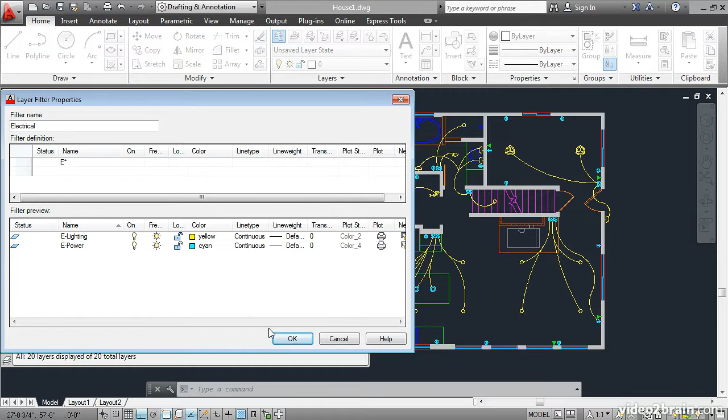Let's call this filter Electrical. Click in the name area here and type capital letter E. This filters the layer list to display only the layers belonging to the electrical discipline. Click OK, and the filter shows you the list.

Click on All to see all of the layers again. Let's create a different type of filter. Right here, you can create a new group filter.

Click the button and then press Enter. We will just accept the default name Group Filter 1, and right now there's nothing in it. Click on All, and then let's drag specific layers into the Group Filter 1.

Drag in A doors, A poche—poche refers to the shading inside the walls—and then scroll down and drag in the electrical layers and the D communication layer.

Then click on the group filter, so it receives only the layers that you drag into it. I'll select all of these layers by clicking on the first one, holding down the Shift key, and clicking on the last one. Then I'll turn them off by clicking any one of the layer's light bulb icons.

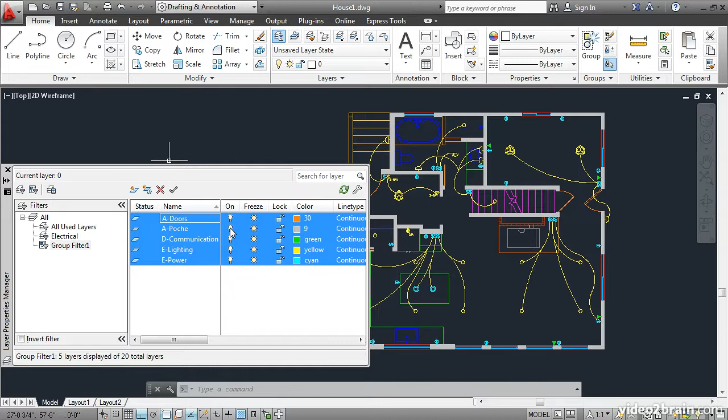Click on All to display all of the layers. You can also sort the layer list by clicking on these headers. I'll click once and then again to sort the list in opposite order, and you can see all the layers that are off are now at the top of the list.

Every drawing has a layer 0. This is created by default. Drawings can also have another system layer called Defpoints, and this is generated when you add a dimension object.

I'll scroll back up and notice that this one layer has a green checkbox next to it. That indicates the current layer, and you can only have one current layer at any given time. I'll double-click on A header right here to set it current. It also says that right up here, current layer A header.

I'll go ahead and draw a line over here in this door opening, and it will be on the A header layer. It's white right now because layer A header is white.

I'll click on the color swatch to open the color picker, and I'll select a color. I'll choose a green up here. Colors have swatches, and they also have numbers here. This is color 94. In AutoCAD, color is used merely to differentiate objects on screen.

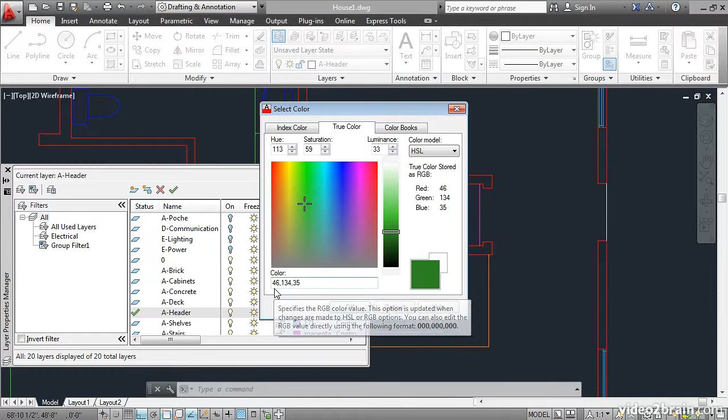It has a different role than in a program such as Photoshop, where you're representing continuous tone. However, you can select true color if you wish from this color ramp. You can drag the crosshair around to select a specific hue and saturation level, and you can also drag this slider to set the amount of luminance.

If you do this, your color will have 3 numbers representing the red, green, and blue components. I'll click OK. You see here, I can expand this by dragging it, and you can see the color number listed here. This is a true color, and these other numbers that are just single numbers, those are AutoCAD color index colors. I'll just go ahead and draw in the other header lines with the line tool.

I'll press Enter, Enter to end and restart the line command each time I need it. And then over here we have some other headers that we need. Again, headers are the part of the wall above a door or opening.

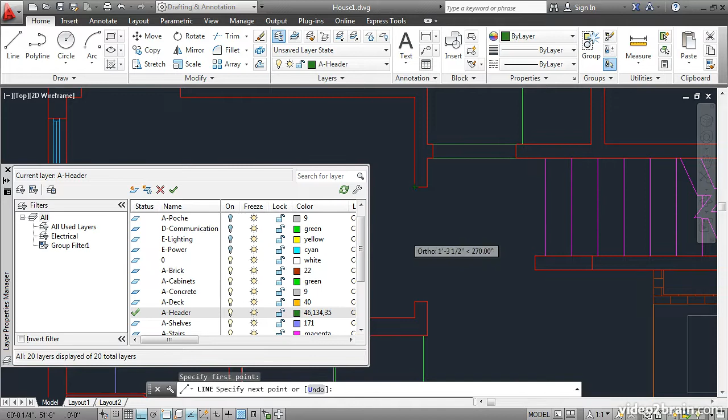Now watch what happens if I turn off this layer. I'll get a warning saying the current layer will be turned off, and asking what I want to do.

If we turn off the current layer, we have a potentially dangerous situation, because I could draw another line here, but it would be invisible since it's on a layer that's off. So you should avoid this practice.

Instead, I'll turn that layer back on and set a different layer current. I'll double-click on layer 0, for example, and then toggle off A-header. If I were to draw an object, such as a line, I would see it because it's on layer 0. I'll turn A-header back on and erase these stray lines.

Layers can also be frozen. If I freeze a layer, it likewise hides it on the screen. The main difference between turning a layer off and freezing it has to do with regeneration. I'll zoom out a bit and demonstrate that for you.

I'll make A-header current, draw a line that extends up above the plan some arbitrary distance, and then zoom extents. Then I'll turn this layer off by setting layer 0 current and turning off A-header, and zoom extents again by double-clicking the mouse wheel. It's the same view—AutoCAD is still considering that line when it does a zoom extents.

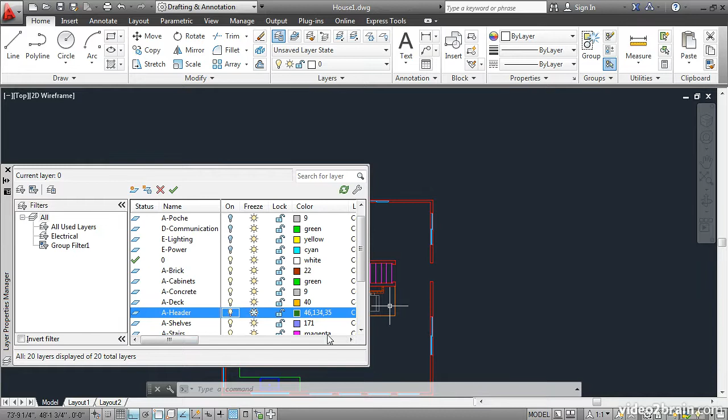However, if I freeze the layer and turn it on, it's still invisible. But if I then do a zoom extents, AutoCAD is no longer considering that object. That's the main difference between turning something off and freezing it. I'll thaw the layer and erase this line.

You can also lock and unlock layers using these padlock icons. If I lock A-header, notice the color dims slightly. If I put the cursor over A-header, you'll see a padlock icon appear, meaning it's locked and I can't do anything to it.

If I try to erase it and click on it, it will say one was on a locked layer and won't let me select it. This isn't really a security feature, because I can come back and unlock the layer, then erase it if I wanted to. Locking is more of a convenience to keep you from inadvertently deleting things you want to protect. Layers have other properties you can access by scrolling over.

Here we have line type. I'll click on the word Continuous on the A-header layer and change the line type to Phantom2. The style of the lines changes—this line doesn't actually have any breaks in it, it's still a single line object, but its representation uses the Phantom line type. I'll change that back to Continuous.

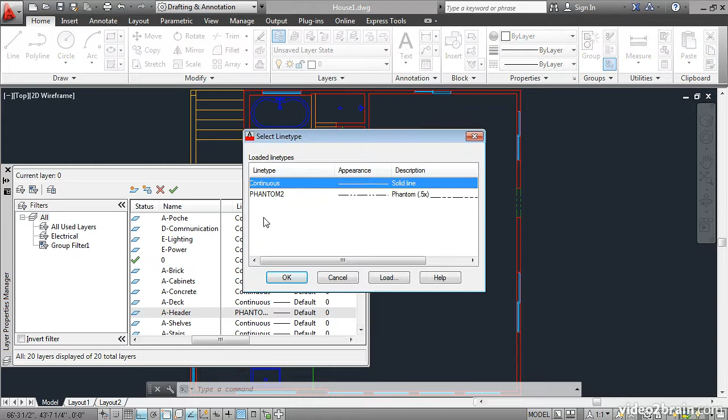You can also set the line weight, which refers to the thickness of the line. Layers can also have a transparency value from 0 to 90%.

The plot style in this drawing is set to a color-dependent plot style, so the color number here isn't editable—it merely represents whichever color I have selected. This is a true color, so it's giving me color 97 for some reason here in the plot style.

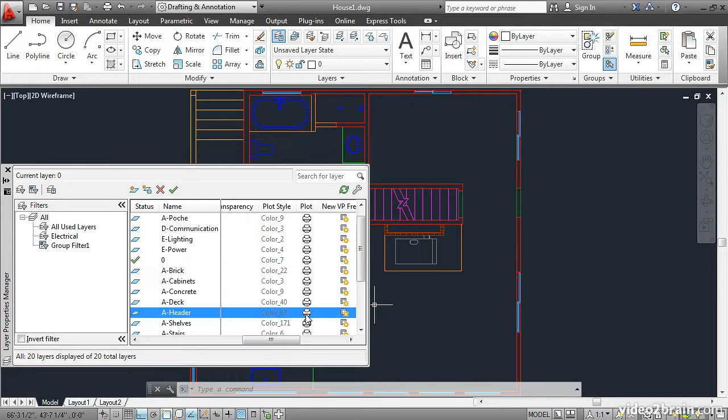This is a plot toggle, so if you click here, you can make it so that this layer will not plot. This can drive you crazy if you're wondering why your plot doesn't have the headers on it—it might be that this flag is selected in the Layer Properties Manager. I'll click it again to enable plotting for this layer.

There's also a new VP Freeze icon, which refers to freezing the layer in a viewport within a layout. So to summarize, you've become acquainted with the Layer Properties Manager, created a new layer, assigned it specific properties, created layer filters, and drawn on the current layer.